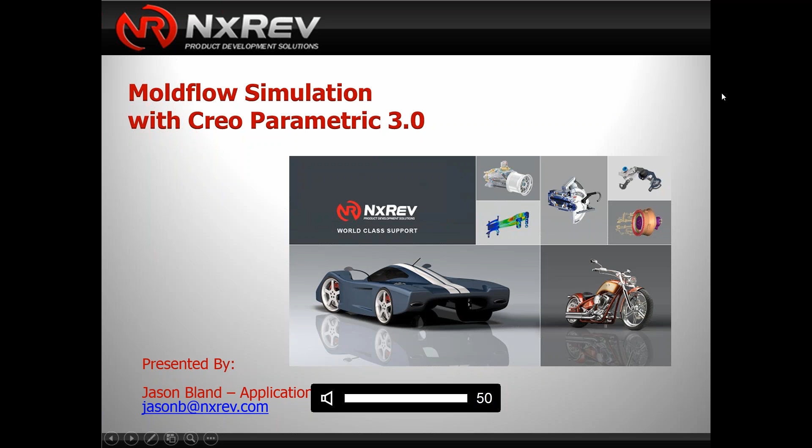A little bit about NxRev and myself. NxRev is the largest reseller of PTC products on the West Coast. We're based in the Bay Area, Santa Clara to be exact. We have operations in both Northern and Southern California, and we regularly service the areas in the northern part of the country, in Washington and Oregon, and some of the other neighboring states.

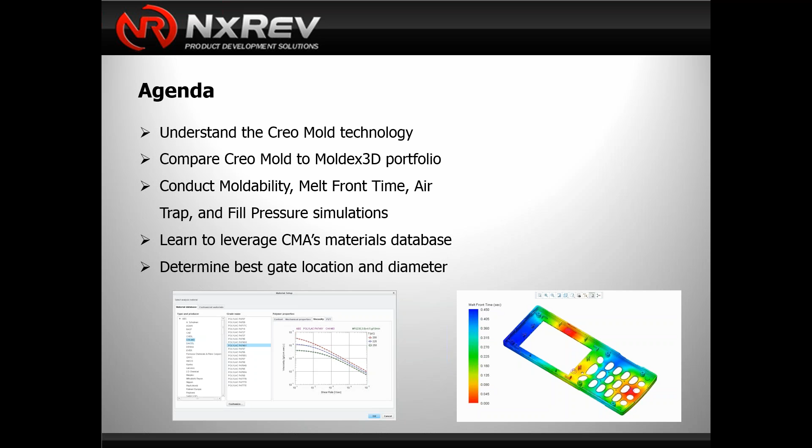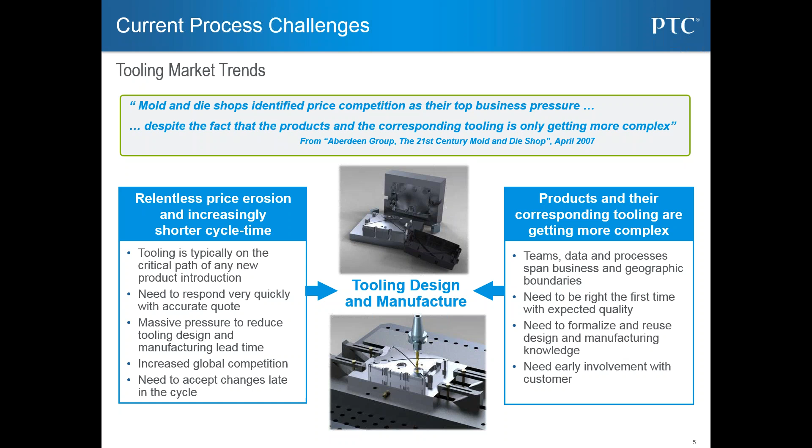Here are some slides on the things that can go wrong in the industry as far as responding to accurate quotes, and basically getting a timely and accurate mold created. So this is some of the challenges we see in the marketplace, and we just want to shorten that cycle up and make it so that you have a better quality mold in a shorter period of time.

So what is the Creo mold analysis extension? Well, first of all, it comes only in Creo 3.0, as of build code date code M10. So if you don't have Creo 3 M10 loaded, you won't see this. It basically provides us with the ability to do some Moldflow simulation of our part. What you're seeing here at the bottom with the chart is most of what we can do, which leads up to about half of this functionality.

We can do checking of wall thickness, moldability, weld line and air traps, and gate locations. What we can't do is some of the other stuff you're seeing there, like enhanced cooling and warpage. We can't do fiber orientation, but some of this other stuff is going to come in Moldex 3D's additional functionality, which you can also purchase, and it integrates with Creo.

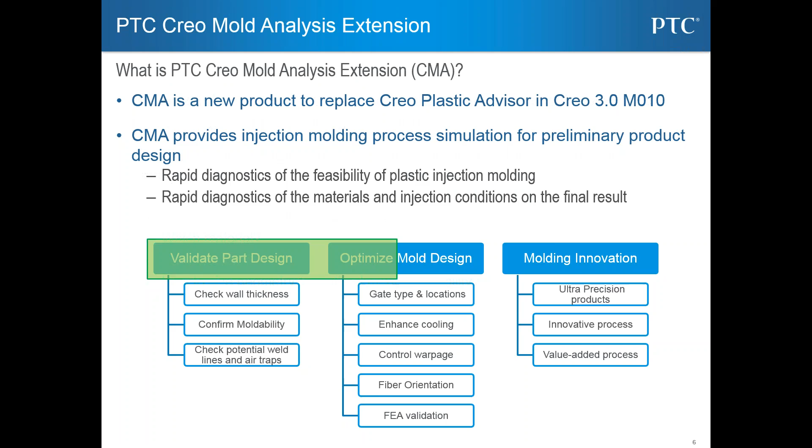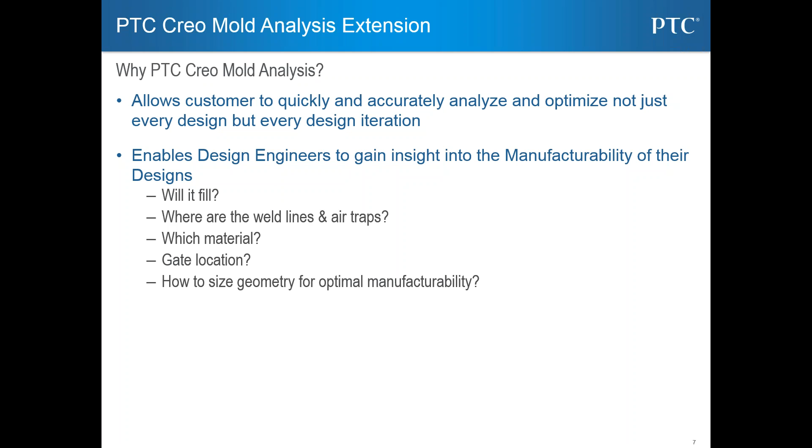This is a tool that's going to be used for the end-user design engineer, maybe not necessarily an analyst. Some of the things he can test for is whether this mold is going to fill, based on the type of material we use, the fill time, and the temperatures we're filling it at. Once it fills, if we're not getting a short shot on our mold, are we getting weld lines or air traps in areas we don't want them, causing imperfections or weaknesses in the part? If so, we can change the material, gate locations, number of gates, and try to optimize a better part out of that.

Creo Mold is fully integrated using the same UI as the rest of the modules within Creo, so it doesn't take relearning a new interface. Again, we're checking for short shots, weld lines, air traps, and sink marks. Those are the common things to check.

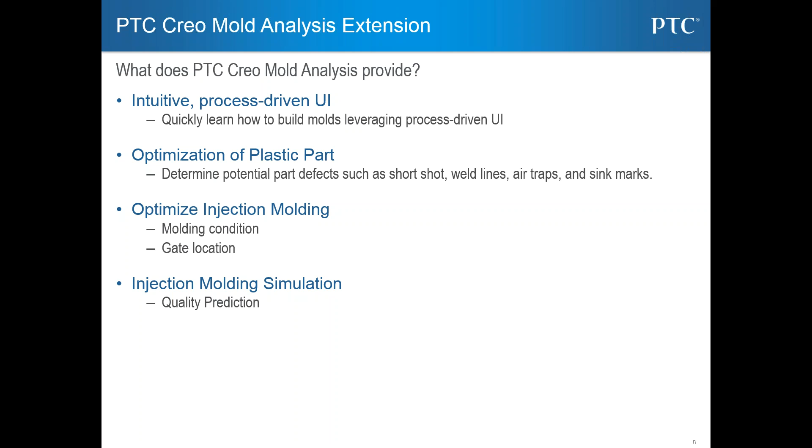This is going to benefit us because we're going to be able to lower our cost of creating the molds, and avoid mistakenly creating a mold that's not going to be what we need. So you're going to see a return there fairly quickly.

I'm going to get into a slide a little bit later where there's a light version that comes default with Creo inside the base package, that you can play around with today no matter if you own the full one or not. It comes with a bit of a limitation on the types of results you can see, but it's more or less fully functional. So pull up a part, make sure it's a solid, and go over to the Applications tab. It should be sitting there if you have Creo 3 M10 loaded up.

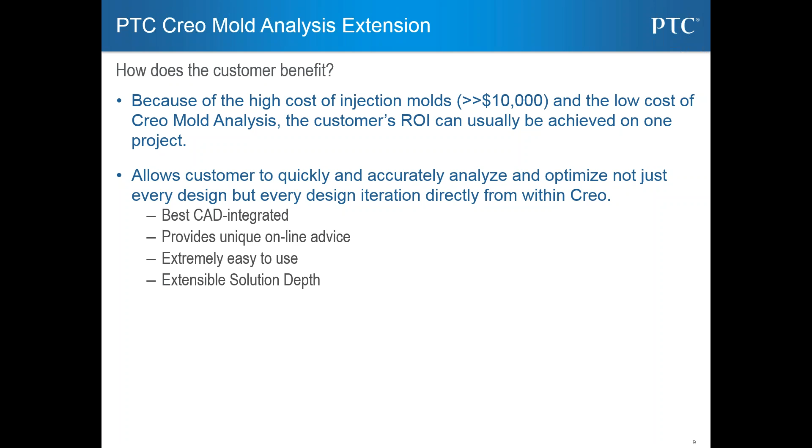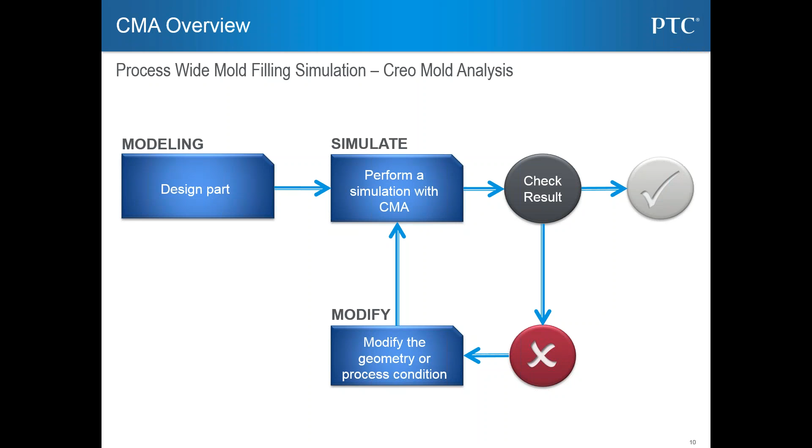One of the things you're not doing is controlling the gates and runners and those sorts of things. That would be something that would come with Moldex3D if you wanted to control that level of the mold, but really it's just gate locations, gate size, the temperature of the material, and other than that it's more or less making part changes, adding ribs and geometry where they need to be to get that mold filled, that part filled appropriately.

Again, what I was saying earlier, you get a free version of the Mold Analysis Foundation. It's a light version, free to all Creo users. That was the thing I couldn't remember - you get the melt front time only, which is the only result you're going to get out of that. But at least you can get the general feel of the tool, and you're going to see the full cycle of how you set up the model, you just won't get all the results. Talk to our sales guys about maybe getting a trial version of the full version of Creo Mold if you're interested.

Here is how Moldex has separated out their functionality. You'll see eDesign Basic and eDesign - those are more or less in Creo. The rest, Professional, Advanced, and Solution add-ons, are basically stuff you're going to need to buy as a separate package to the mold tool. So you get all the functionality within eDesign Basic, which is just checking the fill.

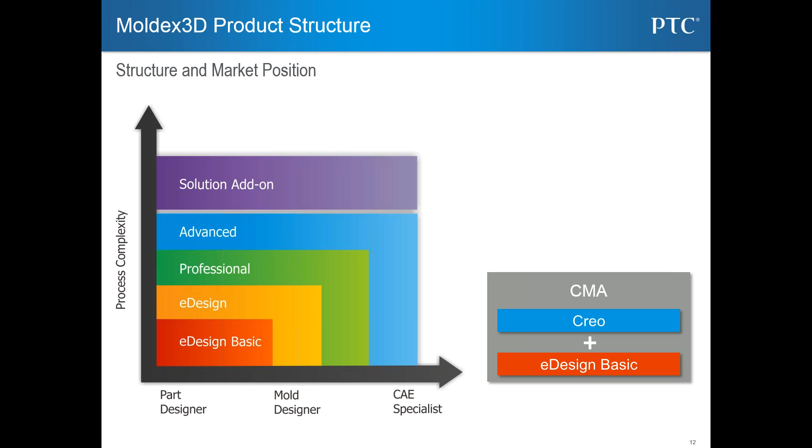But if you want to look at warpage, designing the mold runners and sprues and those sorts of things, you're going to need to bump up to the Professional or Advanced versions of that tool.

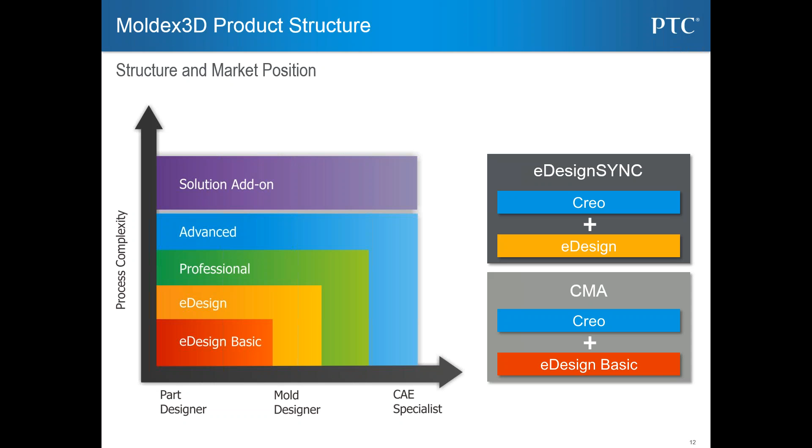Even though those modules aren't going to be integrated and look like the rest of Creo, they do have a toolkit app, eDesign Sync, that locks into Creo and more or less works like the rest of the software. If you guys have ever used a toolkit, a lot of the extensions and modules in Creo started off being those anyway, so you probably used one of those in the past.

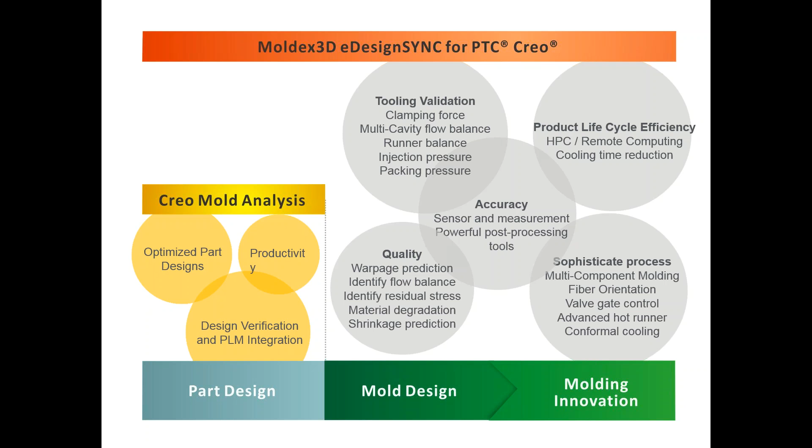Here's another slide showing the breakdown of the eDesign Sync PTC Creo stuff outside of Creo Mold. You've got Creo Mold Analysis to the far left in yellow, that's what we can do now. Everything else to the right in gray is stuff you'd need to bump up to the professional versions for, like warpage prediction, flow balance, residual stress, and shrinkage, all those things would need a more potent set of software.

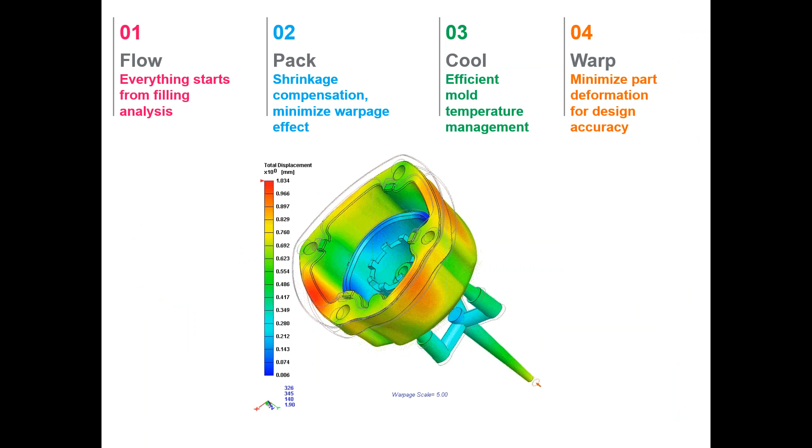Here's one more slide on some of the things you get with the professional versions, 2, 3, and 4: shrinkage compensation, minimizing warpage. Those are ones that don't come with Creo Mold.

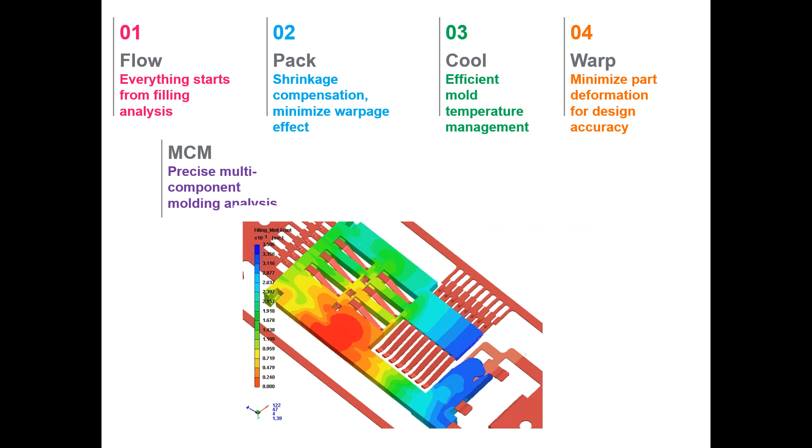One last thing, if you're doing any overmolds, this is another thing you'd need to bump up to the professional versions for to get that functionality. If you're trying to do a true overmold with various materials, Creo Mold really can't do or give you reliable results on that.

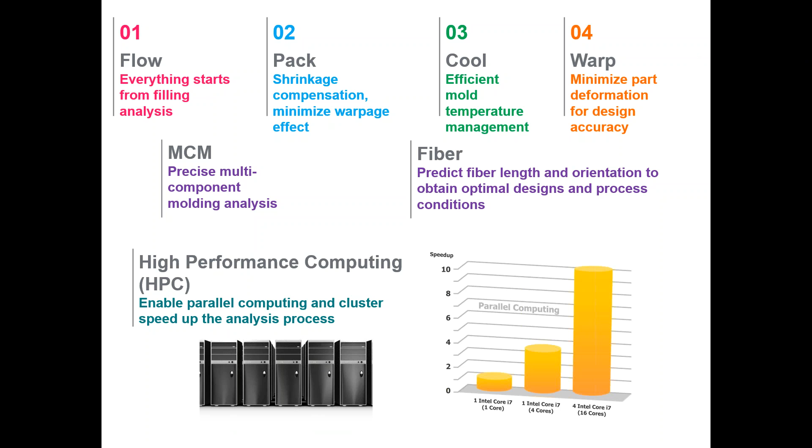The other thing Creo Mold can do with additional licensing is cluster out your analysis processes if the parts are complicated and taking too long to get results on. You can run this through a bank of machines doing the number crunching for you, with parallel computing to speed up the times using additional processors.

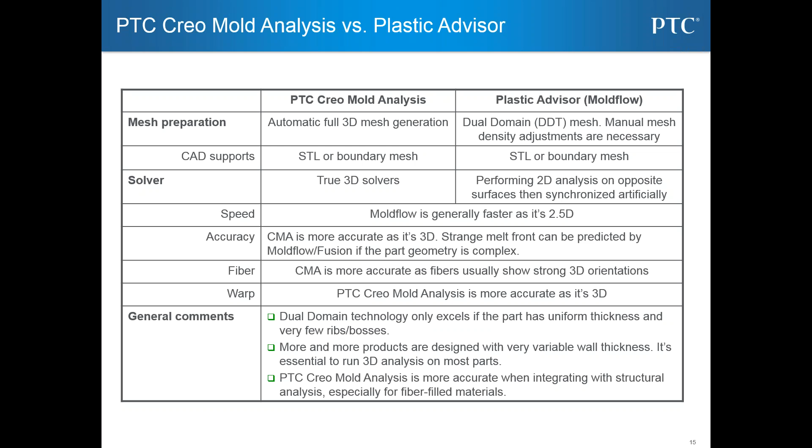This is a comparison between what used to be in Creo called Plastic Advisor, that was Moldflow technology, compared to what's currently in the system, which is Creo Mold Analysis. You see a true 3D solver compared to a 2D analysis, it's like a 2.5D type of analysis done by Moldflow. Moldex provides a better, more accurate result.

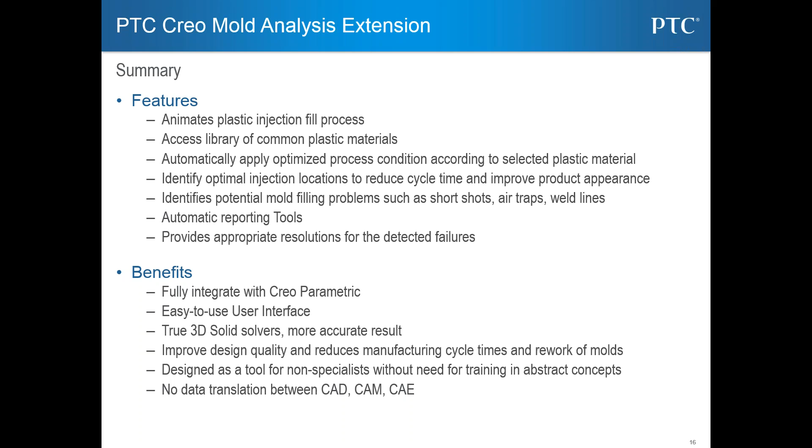Here are the benefits and features of it, just a summary on the tools: ease of use, fully integrated, 3D solvers instead of a 2.5D solver. It can be used by anyone, it doesn't have to be used by a specialist, the design engineer is the target audience here. So you design a part, do the analysis, and you're off and running.

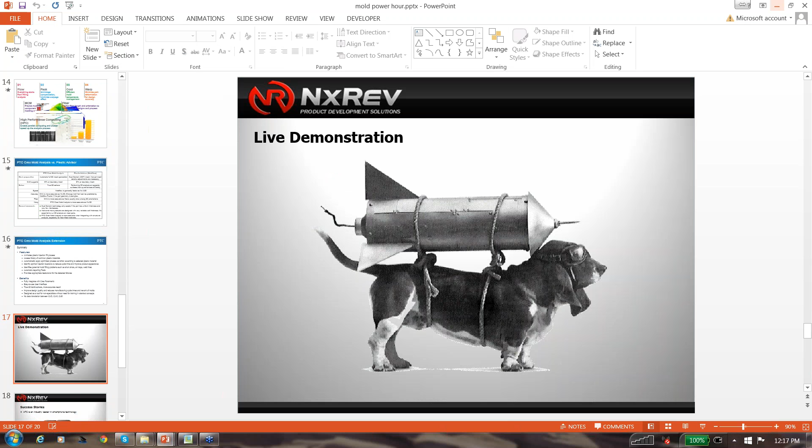Let's do a live demonstration, walk you through the process of setting up the mold and the analysis, and show you some of that. Let me just get this set up for us. Here's our part, it's an older phone part that we have here, I'd say much older, since we're mostly using smartphones these days.

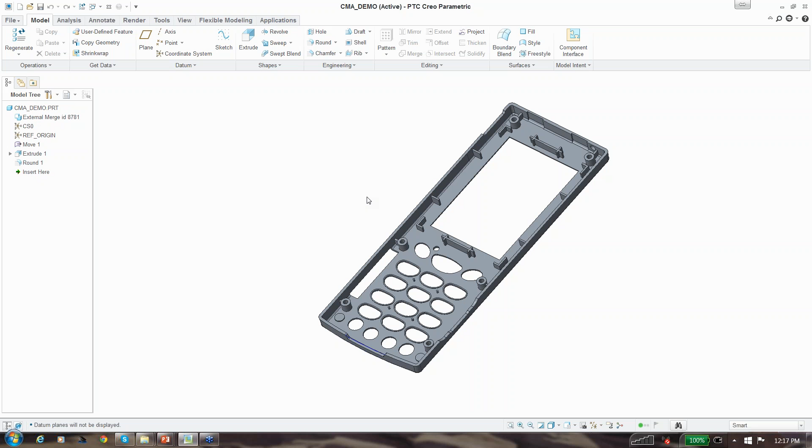Let's take this part. The first thing I'm going to do is bring in some existing analysis, because it does take time to run through the steps, and I want you guys to see the end result first. I'll switch over to my analysis tab and click down on mold analysis, which gives me the interface for mold analysis. Now I have already loaded a project file, so that's important to note.

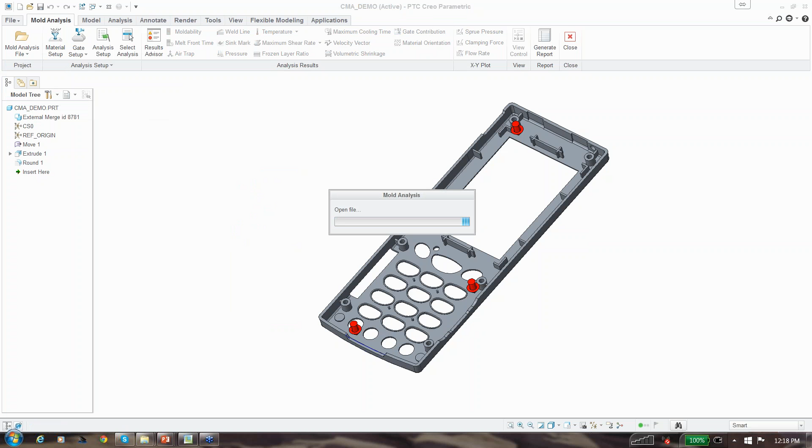If you're going to come back to analysis you may have done previously on this part, and want to go back to the results you created and build upon that, it's important to save to a project, and that's what I've done here. I've saved the project file and now I'm going to load it up. This takes a little bit of time, but much less than it would to actually run the analysis again. It's a way for me to show you guys some stuff really quickly.

And you can see the gates here already. There's 3 gates showing, they have a more graphical indication of where those gates would be, and it would drop in some geometry there for that.

Now if I go to select analysis, going back into the analysis I just read in, you can see that 2 runs have been recorded. Run 1 with 2 gates, run 2 with 3 gates, and I can even see the parameters I placed on it: the material used, fill time, melt temperature, and mold temperature.

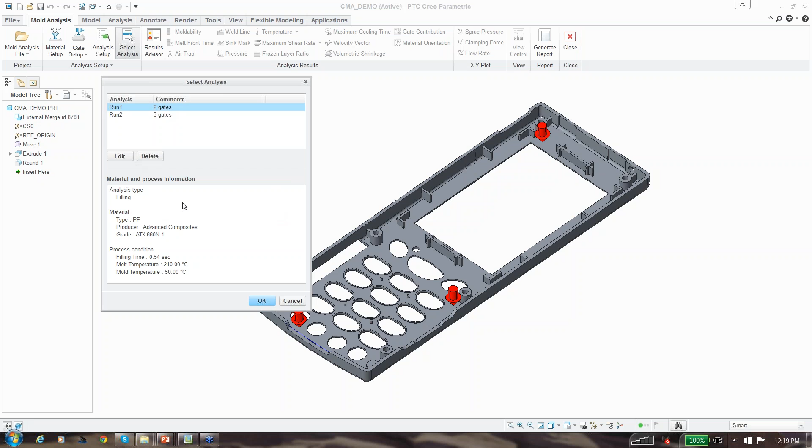Let's take this and look at 2 gates first. I'm going to click on that and say OK, and that's going to show me the results of my first analysis.

And so I like to kind of show the results first of what we've done here, and then I'll go back and peel back the layers and show how it got to this point. So you'll see that it's showing us the melt flow pattern first. It's just showing us the areas of the model that get filled first, essentially, and then last. And we can actually animate this, which we'll do in a bit.

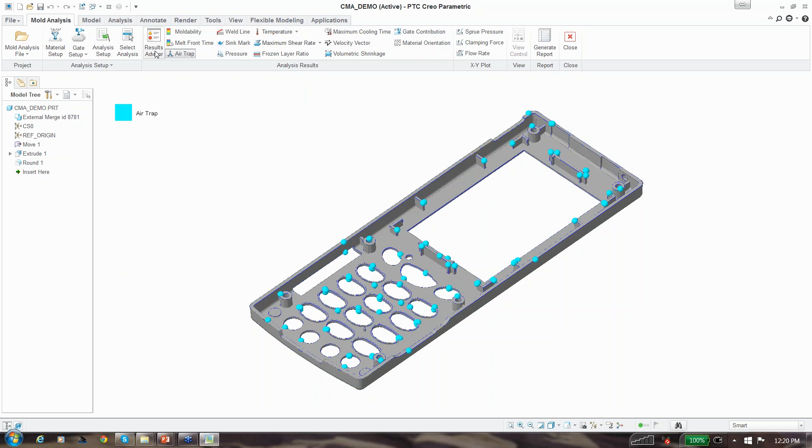Moldability is good, and that just means that this mold is full, it's filled. There's no short shot. It completely filled the part up, or the mold up. We do have some air trap areas. Now we can walk through each one of the results. You can see there's quite a few here, or we can actually go to the results advisor, which is going to point out the areas of the part that we should be more concerned with.

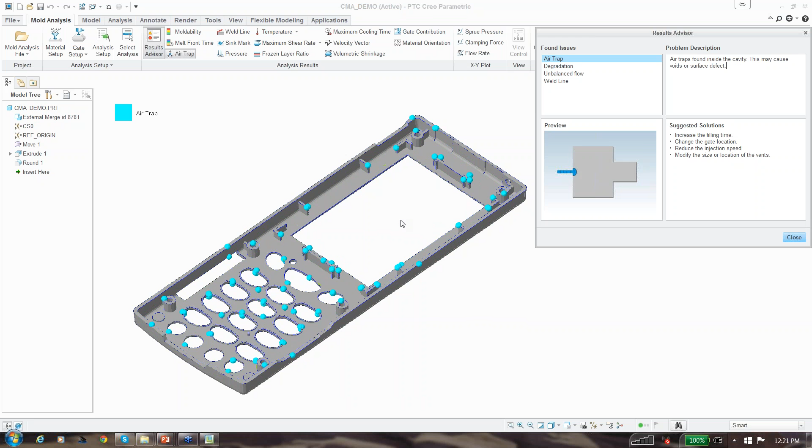And basically it's giving us issues that it found, so air trap issue, and it gives us a description of the air trap and what that can cause, voids or surface defects. And then we also have a suggested solution here, and you can actually see kind of what happens there with the air traps. Increase the filling time, change the gate location, and a lot of this is try it one way, try it another way, see if it gives us a better result. Reduce the injection speed, and then modify the size or location of the vents.

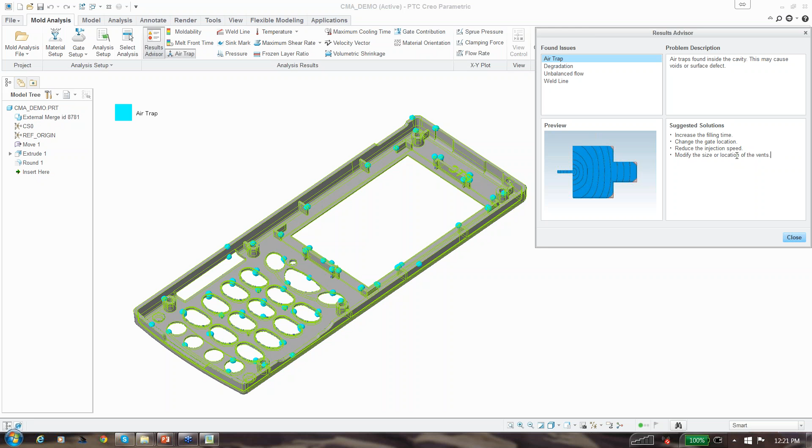Now that's an interesting one, because that one is not something we can really do in the mold design package, but this is something you could do with the higher level functionality. So here we go, we got another found issue, degradation resulting in a melt temperature that is more than the maximum temperature. We can change the gate location, increase the filling time, or reduce injection speed.

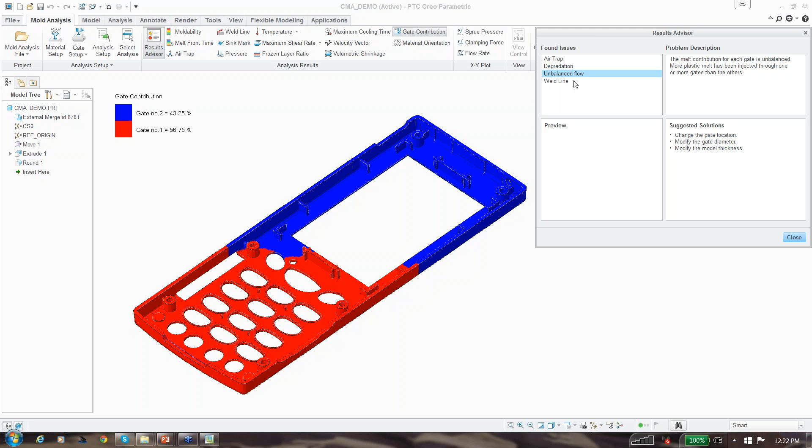We've got a slightly unbalanced flow, although I would say this is fairly good for both gates. You have near 50% balance there. I've seen it much worse. And then we have weld lines within our part. So these might be areas of weakness, areas that may actually break apart if we're not careful with where those weld lines end up.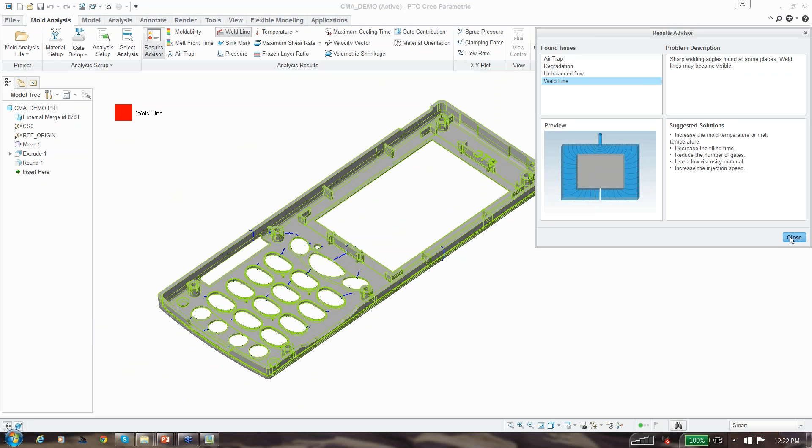So I've done several analyses in here, and you're going to see weld lines regardless. It's just a matter of where you can bear to keep those weld lines, I would imagine. So that's something else you can look at. And you can see it just kind of guides you through those air traps, weld lines. We can take a look at those here as well.

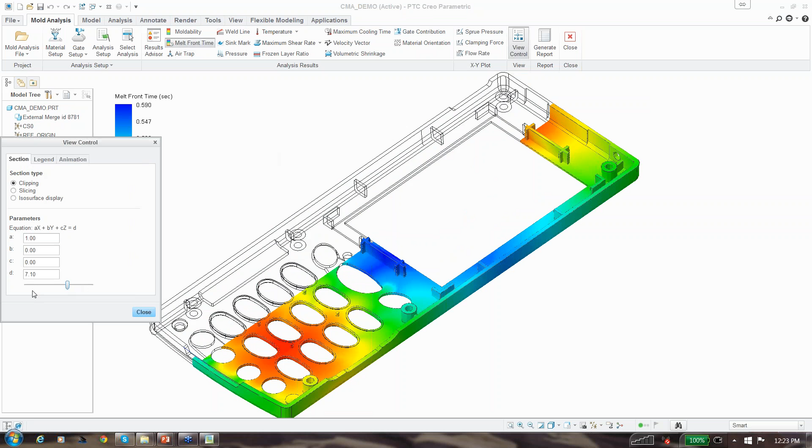Now, if we want to just watch this animation, watch it fill, we can actually watch it through this view control here. It does start us off with a clipping plane, in which case we can drag through the part and view the plane in a 3D fashion. It's almost like a cross-section through the part. And because this is a 3D solver, it's going to be of value to be able to do those cross-sections at this level.

You can change the upper and lower limits of the legend, and then, of course, you can animate. Let's actually increase the speed here, and then we'll go ahead and run through an animation. And it just cycles through.

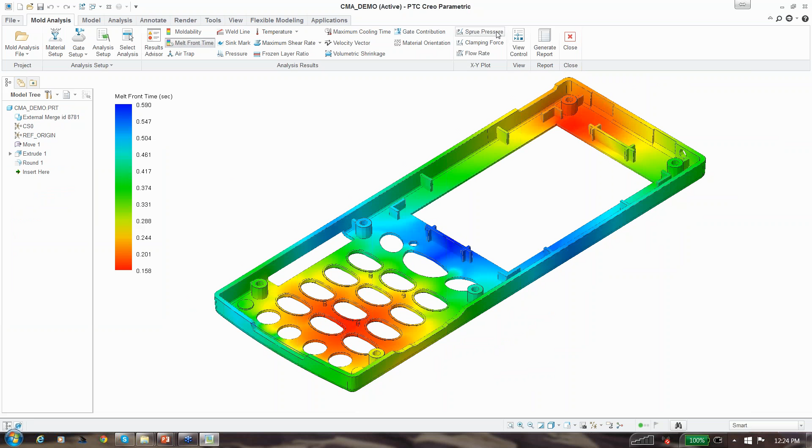Now, one of the other things we can do is we can pull up some graphs on sprue pressure, clamping force, and flow rate. So sprue pressure is expected to go up the more material we're adding. We can actually overlay the analysis results with our plots and watch those together.

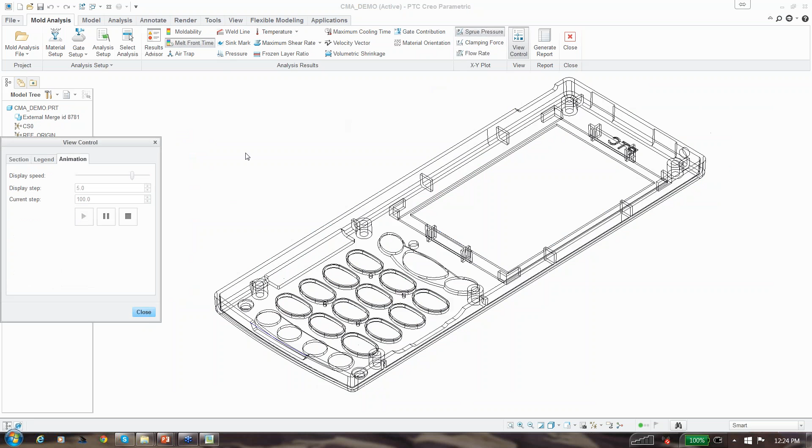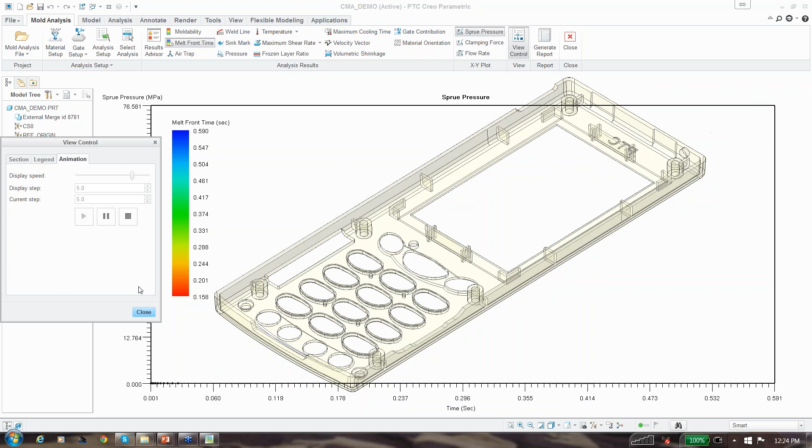Okay, and then how do we record our results? Well, again, what I was saying before was you could save your analysis and then share that with someone else that may have access to the mold analysis extension, or you can generate a report here, and you would fill in this information: title, author, company logo, and this is going to create a PowerPoint presentation with each one of the results that you see here included on each slide.

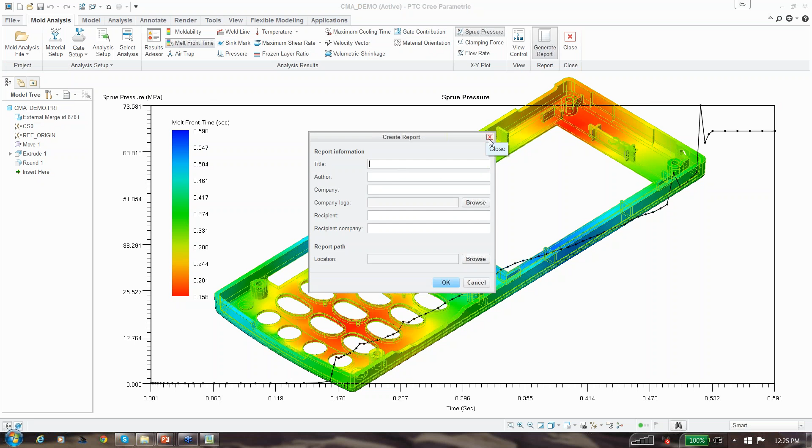You're going to have one of these results. Let's just take a look at some of these other results we have. Material orientation.

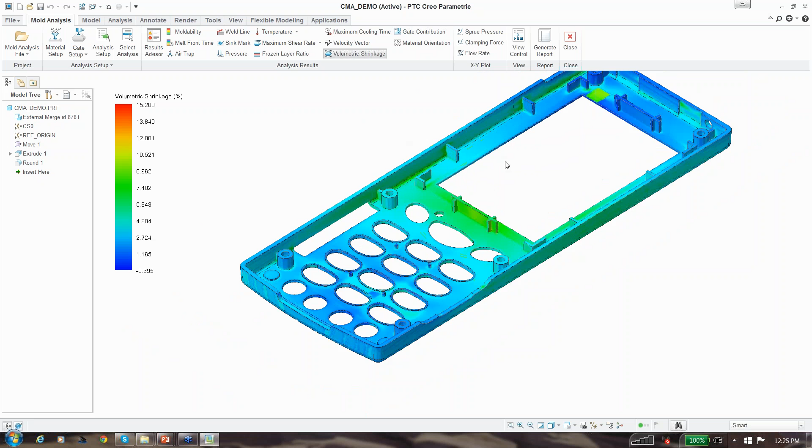Gate contribution. This is the balancing of the gates that they're showing, so you may need to relocate the gate if one's contributing more than the other. Shrinkage that might happen as the part cools. You've got the velocity vectors, maximum cooling times. By the gates, maximum cooling time is going to take a bit longer, and you have maximum shear rates,

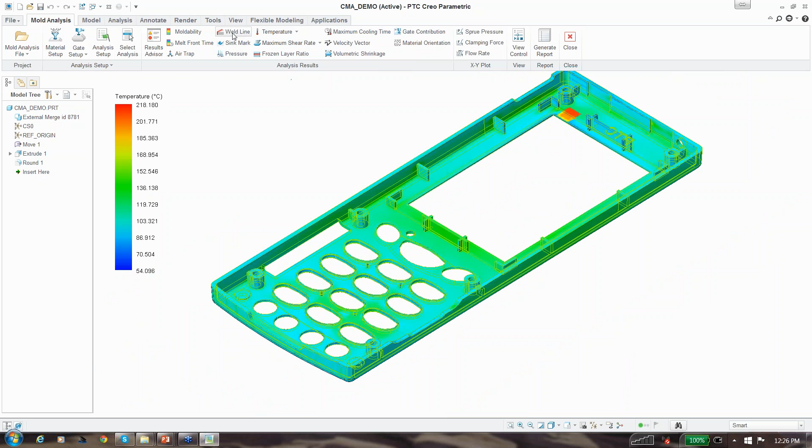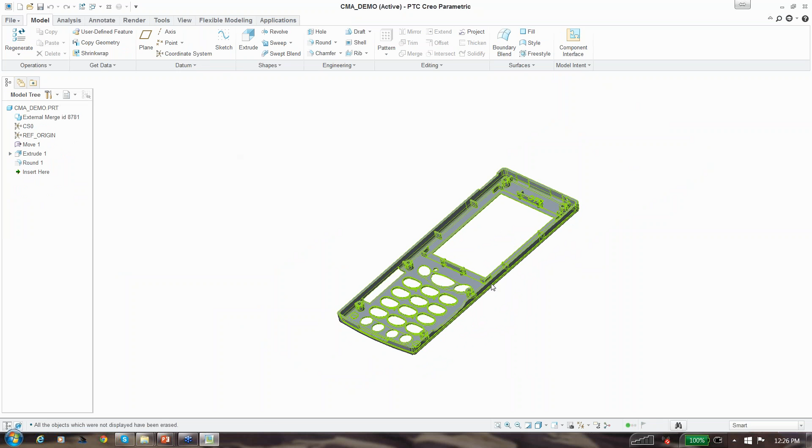temperature of the part. Again, we're going into now sink marks and weld lines, and the other stuff that we've already kind of covered here. So what I'd like to do now is run through the setup of this model. Let me just erase everything out of memory here that I have. We'll start from scratch, essentially.

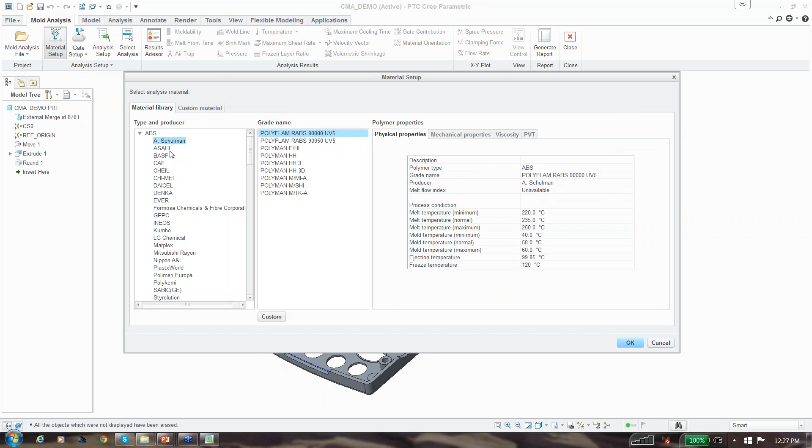Okay, we're going to load up mold analysis, and basically what we're going to do first is set up the material, select the material. So let's just go grab this material here. Now, what I was going to say before on the material setup is that you got your physical properties, mechanical properties, of course. You see plots on viscosity, and if you don't have the material that you need here, you can either customize a current one, copy it basically, and customize it to your needs, or you can add a material from another material database.

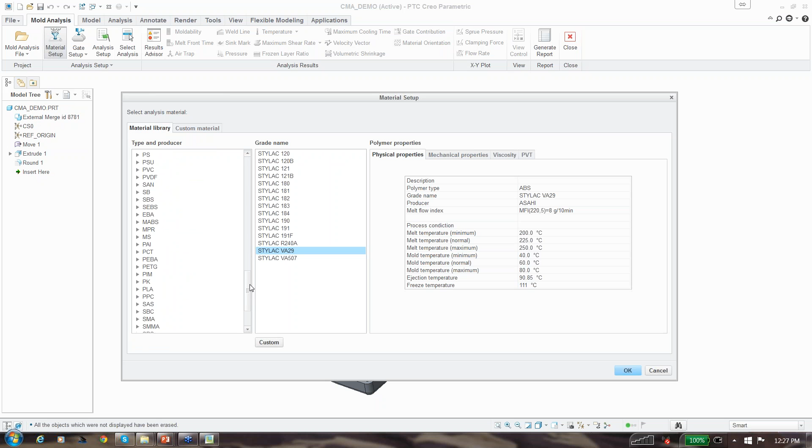And so it's pretty lengthy, the number of materials that are in here. And what they do is they kind of break it down by type, ABS, polypropylene, whatever it might be. And within those, you're going to have the various manufacturers, suppliers, and then their grade. We're going to pick this VA29 and apply that material.

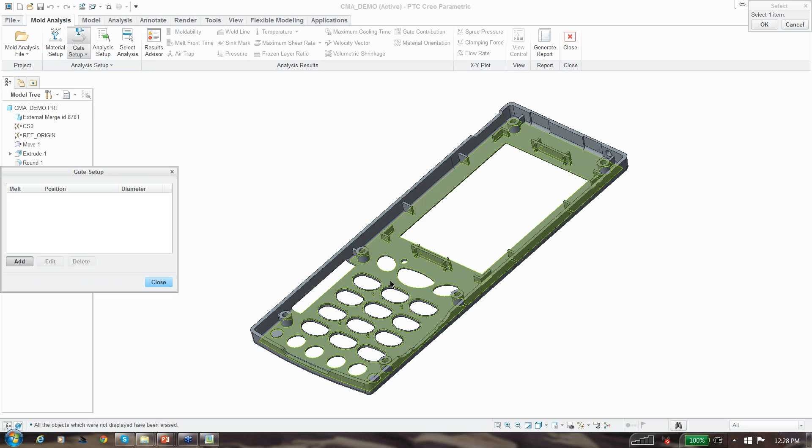And then we're going to set up our gates. There's a couple of ways of setting up the gates. You can do an automatic gate creation, or you can do a manual gate setup. I'm going to do a manual gate setup so you can see that. We'll say add, and then we just need to click down on the surface of the model to add that gate. We can enter the diameter of the gate and then say OK. It records that position, and then I can edit the gate location if I need to, or delete it and recreate a new one.

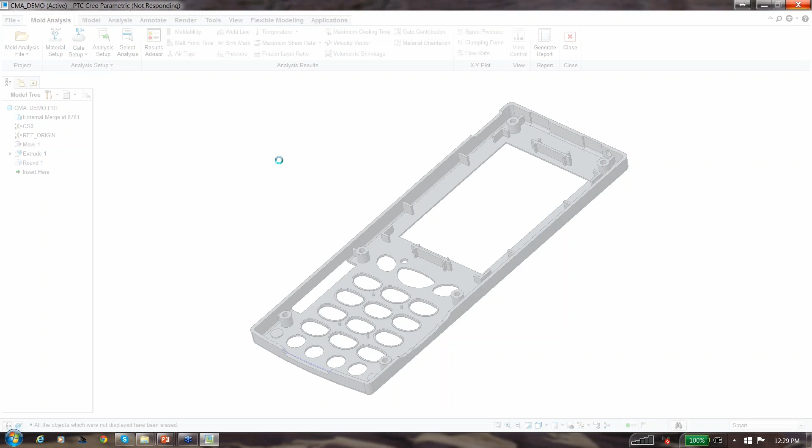Let's go ahead and get rid of it, and let's let Creo do the work for us. I'm going to click on automatic gate creation. Let it calculate the best locations for this. Okay. All right, actually we did one gate. I'm sorry about that. Let's do 2 gates. I'll calculate that again.

There have been some instances where I will run 1 gate on the part with a specific fill time, and the part did not fill. So on this one, I think that was the case, and so I think it needs at least 2 gates with some of the suggested fill times that we're seeing with the material. All right, there you go.

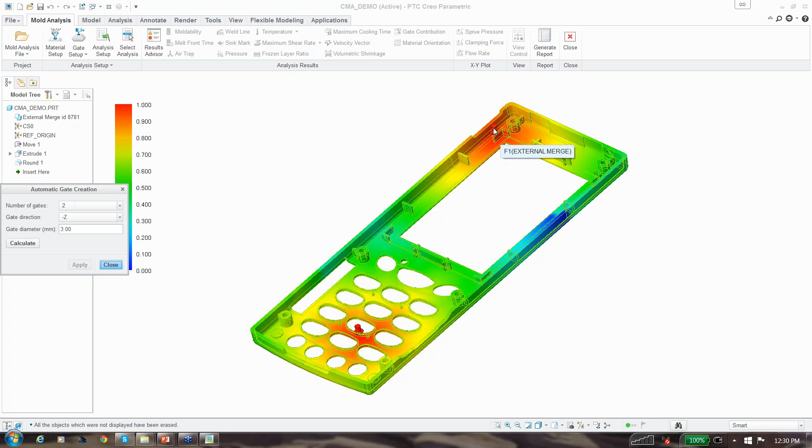And you can see in the hot areas here, the red areas, those are where the gates are going to be placed. Let's go ahead and apply those, and you can see one's sitting here and one's sitting here. Let's close that up, and you can see those more clearly. Now, is that a good place for a gate? Maybe, maybe not. Probably would just relocate it to here. It's up to you guys, or maybe atop of this rib.

Okay, now the next step, and you can see that you basically work your way across. That's kind of how PTC is approaching a lot of their interface these days with these tabs, is that you work your way across building out the analysis, model, geometry, or whatever it might be. Now that we have our gate locations, we're going to set up the analysis to run, and you'll probably get that on the first run.

Okay, let's see. We have our ABS, Asahi Stylac VA29. It's recommending a fill time, melt temperature, and mold temperature. Now, if you go back and look at material, there is a range for some of these things. You can go to the top end of the range or lower end of the range, play with the numbers a little bit. And if you try to go outside of the range, it will kind of balk at that, and it'll let you do it, but it'll say that you're going outside the range for that material.

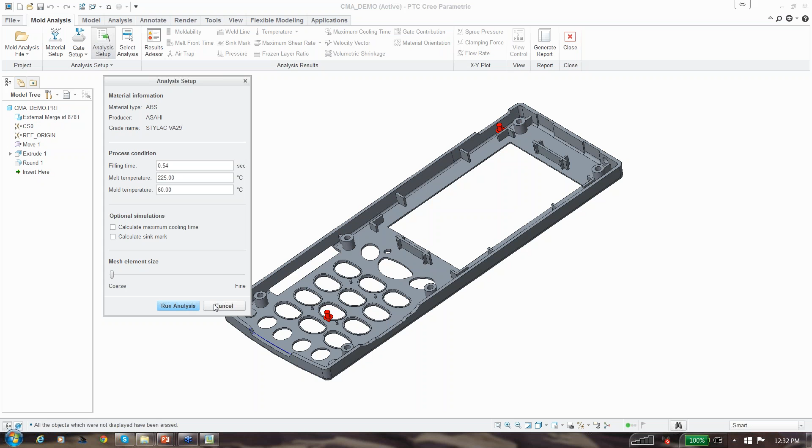Now, if I were to run the analysis on this now at coarse without maximum cooling time and sink marks, it would be a fairly short analysis calculation time. But if I bump this up to be more accurate and add those two, you could be looking at 20 minutes, 30 minutes. It depends on the material, of course, and some of the other stuff behind it. But I'm not going to run this analysis because you've already seen the end result. And we'll go ahead and cancel there.

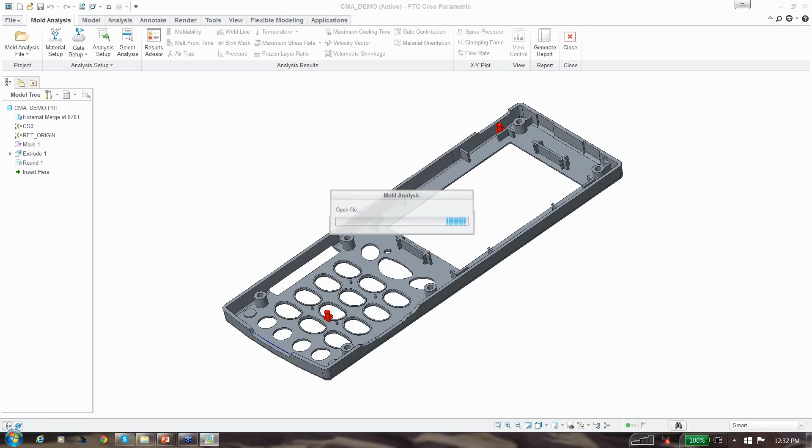Let me just go back to retrieving my project file. And I'm going to show 3 gates versus 2. Let's just see if using 3 gates versus 2 is going to help us with our weld lines, air traps, and sink marks. We do have the 3. I just want to make sure that it is going to use 3 gates here, so I'm going to select it and just say OK.

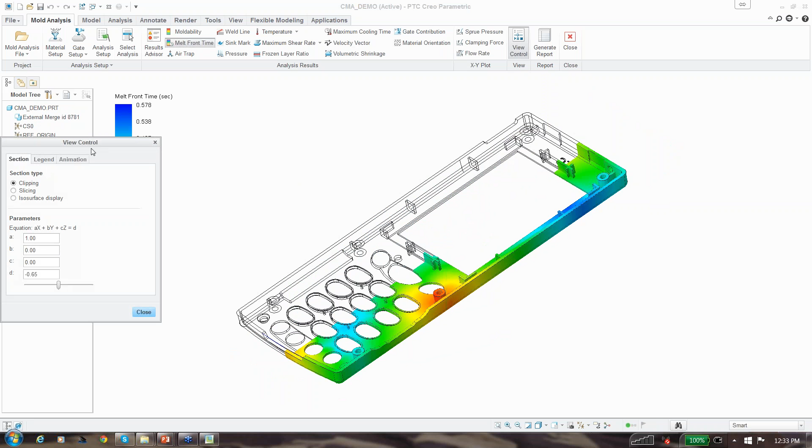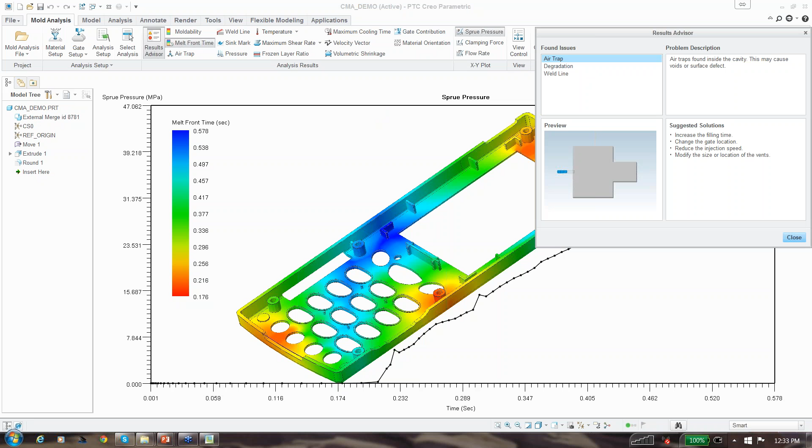Okay, we got our 3 gates now. Let's see, before I do that, let's take a look at the pressure we're applying to the sprues. And we'll check the melt front time first. Actually, before we do that, let's do a results advisor and see if it improved any of our problem areas of the model. Here we go. All right, so the sink marks are no longer in this list.

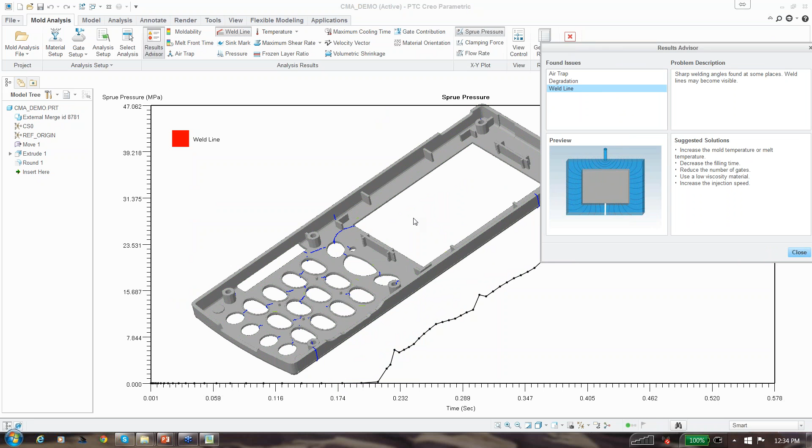Now, just because we have weld lines doesn't necessarily mean that we can basically call it quits and try another analysis. It really depends on where those weld lines are and if you can kind of live with those locations for the weld lines, as well as the air traps. Let's just say that this model is good. I'll run some animation on it so we can watch this fill.

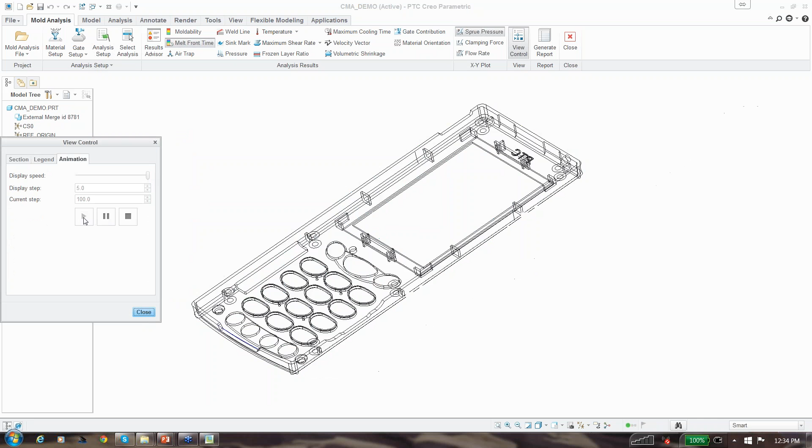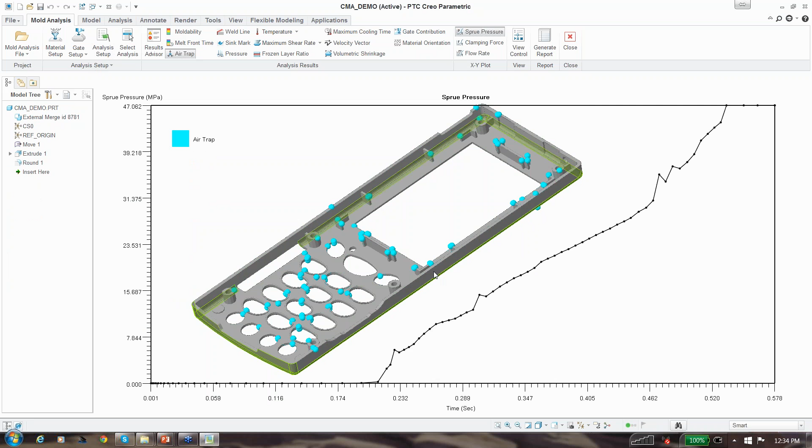Yeah, looks good to me. Moldability is good. Air traps. Do I have any air traps on the other side? Yeah, a couple. Weld lines, quite a few still, but with all these little areas in here, I'm not really sure how much we can avoid that. Are we going to have any sink marks? There's a couple of areas for the sink marks.

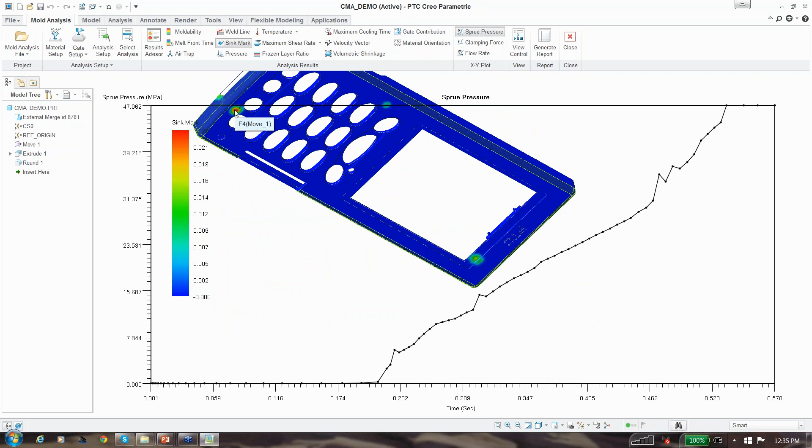Those are obviously where you're seeing the gate locations. Lowering the temperature might help with that, but you have to play around with the numbers until you get the result you wanted, but sink marks are no good. You don't want those on the part, especially on the outside. Yeah, so that's pretty much it in a nutshell. There's not much more to it than that.

You're basically setting up your material, your gate locations, and then you run your analysis. You can store your analysis in project files and rerun your analysis by selecting the analysis, and then in the end you can view it through animations and reports and view all of your analysis.

If you've got the mold design extension, it can be shared between multiple users, and if you've saved your project files to maybe Windchill or to a server folder, you can then share that out to the team and they can view those files through the same application.

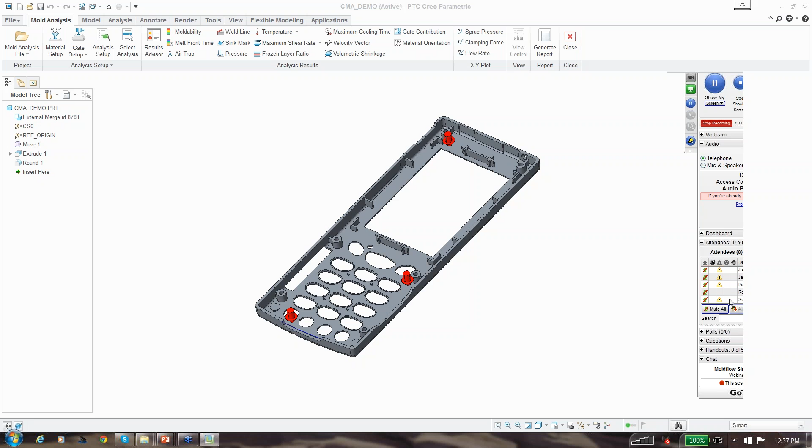Okay, I got two questions here, good ones. One of the questions is what technology we're using. It is not Moldflow. Creo used to use Moldflow in, I believe, Wildfire, Creo 1 and back, or actually Creo 2 and back. They used Moldflow technology, but since Autodesk acquired that, they've now switched over to Moldex 3D. Look them up on the internet, Moldex 3D.

They are legit. They have claimed that their technology is better, and everything I've read so far kind of leads me to that same conclusion. Make your own choice there, but it's Moldex 3D, not Moldflow. The other question I have is: is everything that is seen here included in the free mold analysis? Yeah, all of the materials, the setup, you can do all of this. You can even save the project files.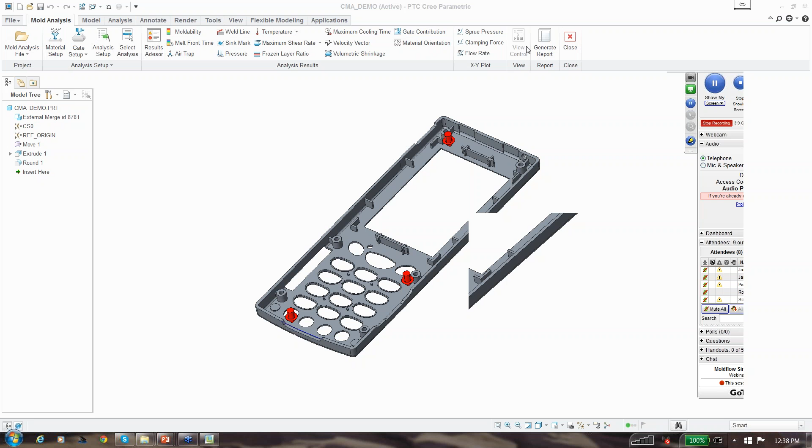The thing that you miss out on not having the full version is all of this analysis, all of the results. The only result you get is the melt front time, which is the animation that I showed you before, and then the results advisor. You may get these over here, I'm sure you do, but you just don't get all of the other results that you see here.

So if you're curious about it, if you're using Creo 3 now, you should be able to see it inside of it. And if you're using build code M10 and up, you should be able to use this right now. Make sure your model is a solid and not a broken up set of surfaces. It's got to be solid geometry. So hopefully that answered the question.